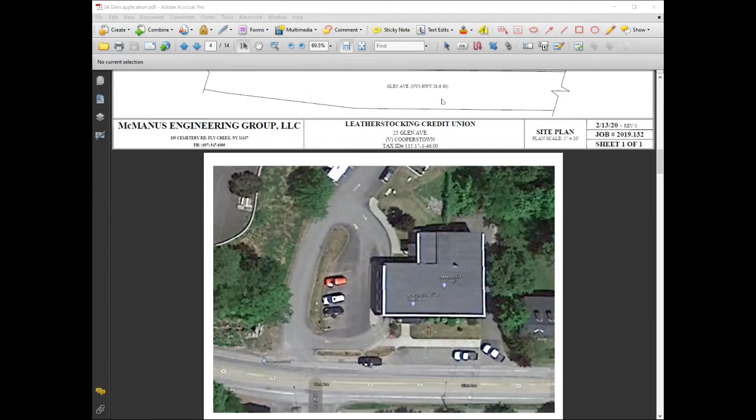So there's proposed and there's existing. If you go back to the proposed... oh, I see what you're doing. So they're saying, where's the right of way? They're saying to continue the pink sidewalk all the way across through that green space. Yeah, at least that's the way I interpret it. Oh okay, I see what that is.

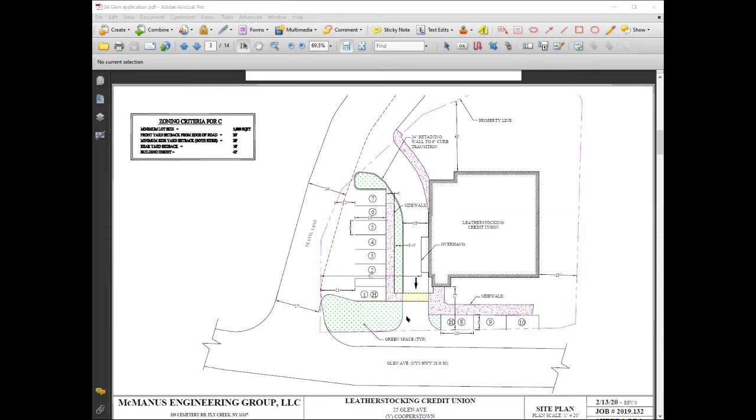That's something I would definitely respond to them. I don't want to dump people back out onto the road. That's not the intent, especially in that intersection location. The intent of the sidewalk here - if you go back to the aerial, you can see the sidewalk jogs back to the corner of the existing overhang. We're just continuing that existing sidewalk in the front there, across, instead of jogging.

Yeah, I think they're trying... it's the bridge to nowhere. Well, my point is though that if somebody is coming up Maple Street and sees the corner of where Maple is and wants to cross to get to the credit union, where do they walk - across the lawn there on the other side?

No, they walk down in front of the Thanksgiving Home and then cross. There's a sidewalk there. That's not a practical solution - people aren't gonna walk two blocks to get across the street. It's not two blocks, it's like half a block. It's one block from Maple down to Grove, then there's no sidewalk across Grove, and no sidewalk on the other side.

I'm looking at a sidewalk at the bottom of the screen of the photo, from Maple. You walk down to Grove, cross to the other side, to the north side of Glen Avenue. There's no sidewalk running up that side of Glen to the bank - they're walking in the street. The only sidewalk is on the south side of Glen. There's no sidewalk here, right, exactly.

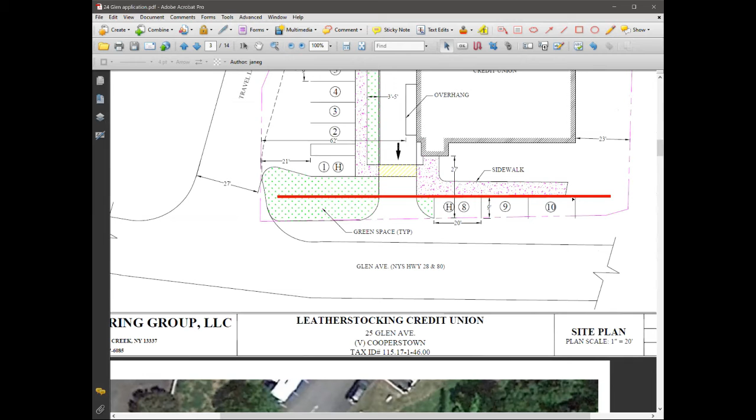They are going to make, in the new drawings, that become a parking space. We're not changing any of the parking in the front. Nope, we're not, we're only taking one of three spaces out. Those three parking spaces, 8, 9, and 10, are existing spaces remaining in place and unchanged. Is there no parking space 11, right John? That's correct, it's the end of the driveway. You see a car in the picture, just kind of kitty corner in there.

People park there from time to time, I've done it myself, but it's not legal. No offense, John.

It's not legal, it mentioned in the discussion an angle-in parking spot. Is that the angle-in parking spot? No, there's no- what you see is what you get. That's all we're doing, we're just creating an entrance where the pointer is right now. It's the only difference. Again, we're not talking about a municipal sidewalk here.

No, Richard, with that car parked at an angle, that's a car that's illegally parked in a driveway. Okay, forever and ever, because this picture is going to be forever documented.

Let's see, I have a question. If they decide to develop the property next door, or if the village decides it wants to have a sidewalk there along Glen Avenue that extends east from this property in question, is it common for a public sidewalk to connect to a private sidewalk and all of it become a public pedestrian way? No, it's very uncommon. Right, okay. So then it wouldn't really be legal for them to connect any public sidewalk that approaches from the east to the private sidewalk in front of this property, right?

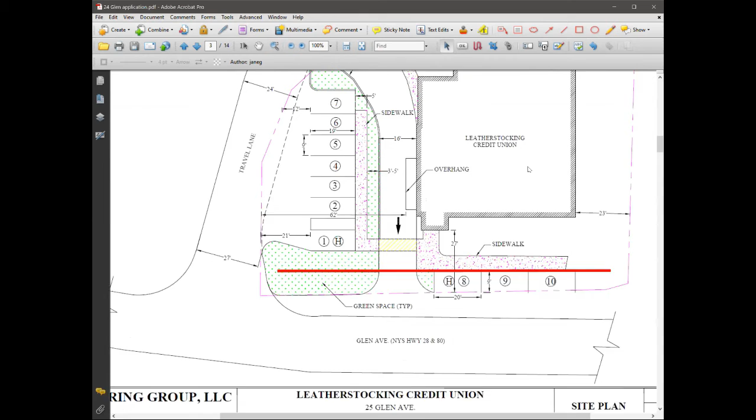Did you guys get comments from the county? Yes, do you want me to put them up? Oh, you got those as well? Yep. I didn't mean to move on, I was just curious. I thought Jane, in your last email, you said you hadn't gotten them. No, I said I hadn't gotten DOT. Oh okay, hold on one second.

Can you see? I can't tell whether it changes when I switch from one PDF to another. Not yet. Okay, hold on. Still the map. It's still the map. Hold on then. Okay, now. Thank you. Let me know when you want me to flip to the second page. I'd flip. Mm-hmm, that's pretty obvious, yeah.

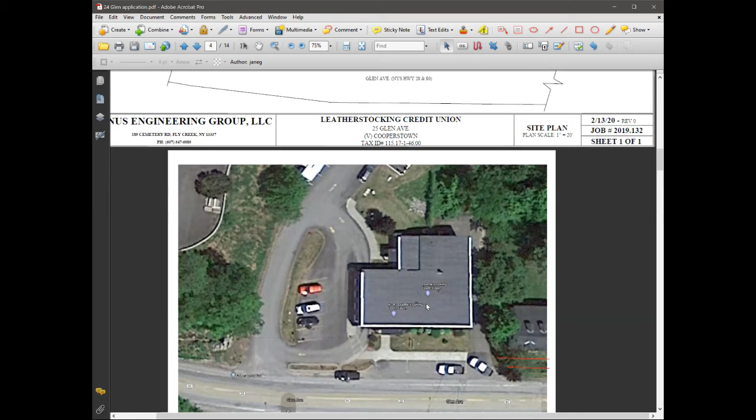And then we're probably, in all practicality, adding about one more space to the site. By the time people jockey into their positions, whether they're striped or not, we do have one handicap spot down at the bottom there. So that's taken up a little bit more space with this.

So, is Slot 8 handicapped? It's marked handicap, but it doesn't have the extra wide entry for the wheelchair. It's accessible, but that's not the legal handicap spot. That's marked for convenience. Number 1 is the legal handicap spot.

So what is our next step? Are we finished discussing this, or what do we need to do?

Will there be a do not enter sign from Glen into the overhang? That would make sense, right, Jane? I didn't catch everything Jean said. A do not enter sign coming from Glen Avenue into the new drive-through area.

Right, there'd be a no entry sign of some sort, yes. DOT's going to require me to put something there. So I have to put something. But they said no signage on their property, right?

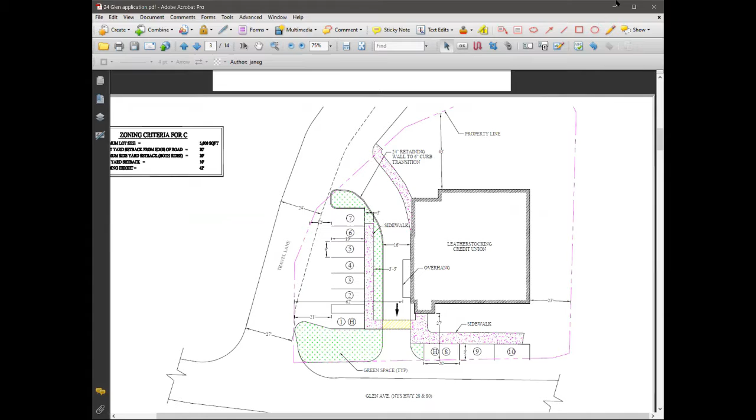Jane, would you put up the SEQRA part 2? Sure. Can everybody see it? Mm-hmm. Okay.

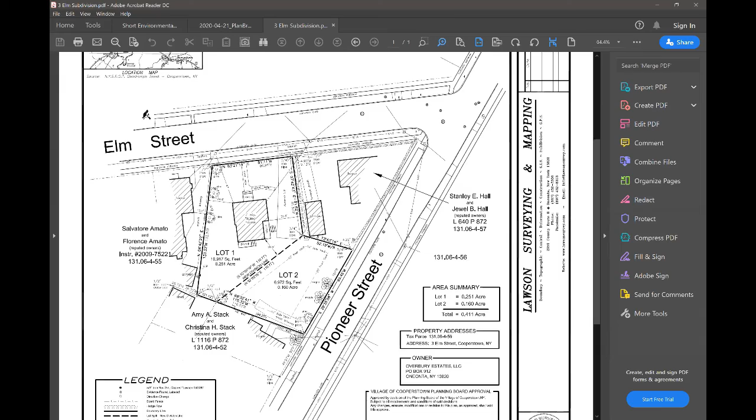That's good. Oops, hold on. This. There we go. Okay.

So it's marked lot 1 and lot 2 is now a single lot? Is that correct? Yes, it is. And the new dividing line will be the dashed line.

Does anybody have any questions? I just have a concern about the hitching post. That's a historic element in the village. I think it's listed on the national historic district. Is that on this property or on Amy Stack's property? I thought the hitching post was up on the corner one. There's another one, got to walk around Pioneer Street a little more, Jane. It's down by Amy's little walkway. So it looks, there's a little, near where the iron pipe point is.

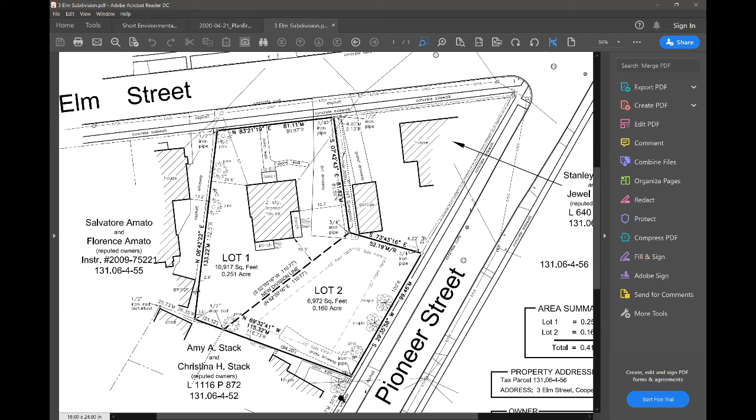Okay, hold on, let me zoom in to see if they documented it. It's there, yeah, it's that little thing, it says iron pipe, but it's over there. Maybe it's underneath the property line. There's GP and then I don't know what the thing is underneath there. I just can't tell whose it is.

I just want to make sure it stays, being the historian. Well, I know that Dan is not planning on, once he subdivides it, it's going to be up to the new owner as far as putting a building on it and stuff like that. Yeah, I mean, if somebody's going to turn that into a driveway, that could be a problem. There's an existing driveway now. Right, but that's dashed in. I just can't tell whose property it is. The way the line is drawn, I think it goes right through it.

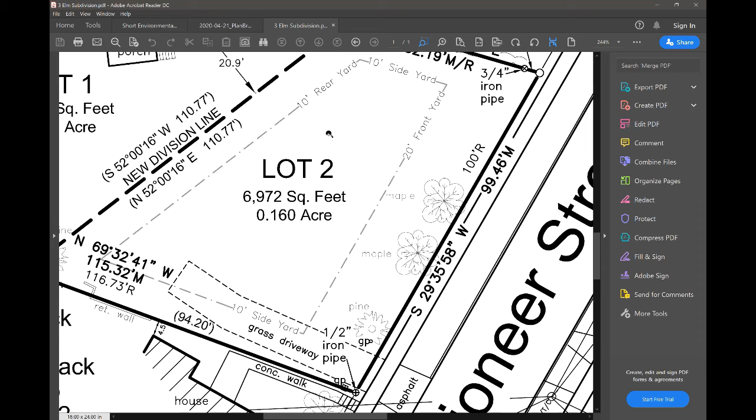So Dan, you're not building on it? I just assumed you would be building the house yourself and then selling. But initially, I would offer the parcel up for sale. I can back that up with an offer to do a build service as well. If I don't get any takers, then I'll revisit it and look to develop it myself. Okay.

And then I have concerns about the mature maples and pines. Would that be impacted by any division? I don't think it would. The division is just... Just a division? Okay, that's all that's before us.

And any building on lot 2, that would be exempt from site plan review? Correct. So but they couldn't demolish the historic elements or whatever. So, yeah, okay.

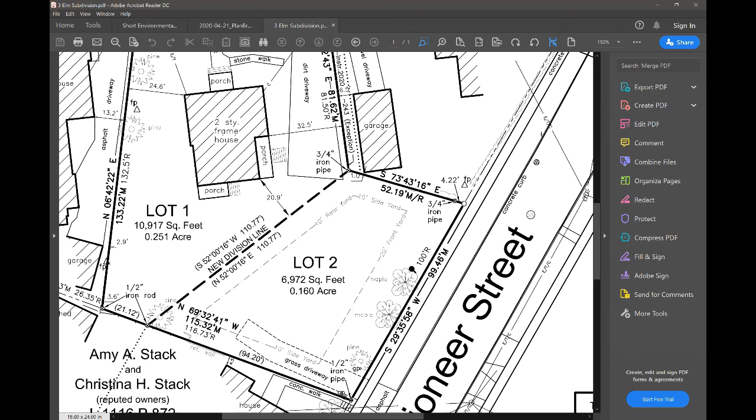And for SEQR, as we've done previously, I don't view this as segmented since we have no requirements in our zoning law to review the private dwelling on lot 2, and I believe it's a type 2 action under SEQR. Okay, no, I agree, it's not a segmented review at this point.

Dan, just for comparison purposes, what's the square footage of the house you're currently working on? I believe it's around 2,500 on 2 stories. Yeah, no, I was just trying to take that footprint and put it on this lot to get a sense, but okay. That was just a point of information, has no bearing.

Does anybody have any other questions? Well, part of this preliminary review, within 45 days, we might as well do it now, we have to come with the finding of whether or not the subdivision, from the statutory language, meets the objectives of the chapter, being the subdivision chapter. And I feel that it does. Does anybody have any other feelings? Yeah, it does. Yep, I agree.

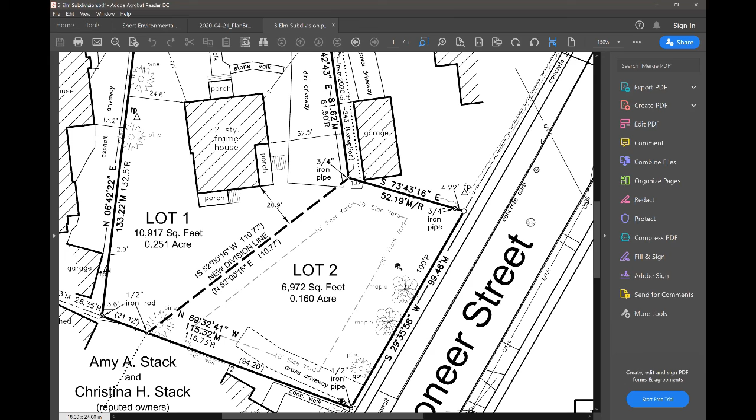Okay, so we're up to minutes review. Has everyone had a chance to look at the minutes? Yeah. Does anybody have any comments? No. Well done again, Michael. Oh, thank you, Ellen. I move approval of minutes. Second. All in favor? Aye. Aye. Any opposition? Abstentions? The motion carries.